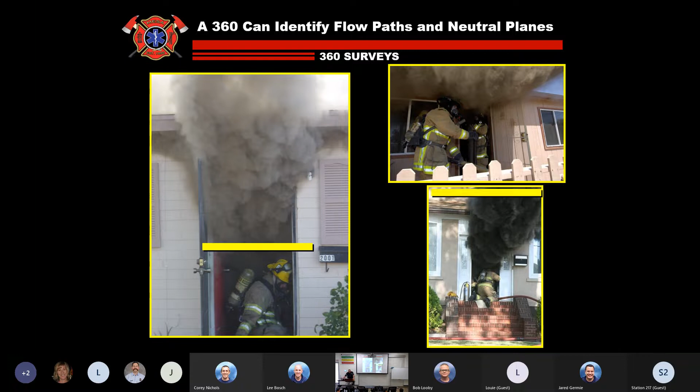It can also help us identify flow paths and neutral planes, and that'll help us determine the seat of the fire or what stage the fire is in. So if we look at these three incidents here, it should be pretty obvious where the neutral plane is, that's where the high pressure smoke and heat is coming out the top, the cooler air is coming down in the bottom, and the line in between is the neutral plane. This is Captain Obvious stuff here, but hopefully that should remind you.

Now, we talk about flow paths, and flow paths, when we get into the reading smoke class here next class, we're going to talk quite a bit more about flow paths. But this is one of the things that wasn't discussed a whole lot probably until about 10 years ago, maybe a little more, where we started discussing flow paths and the challenges associated with it.

We would go, and you see in certain cities, not so much here, but back east, one of the first things the crews do is go around and start knocking out windows. Well, what does that do for a fire that's in a vent limited stage? Gives it everything it needs, right? And then it shouldn't surprise us when all of a sudden the building's fully involved, and they go, wow, that was crazy, how'd that happen? Well, it shouldn't shock us.

But as we arrive on the scene, if we have this where we have the bi-directional vent, whereas we have cold air coming in from the bottom or fresh air coming in from the bottom, hot pressurized smoke coming out above, keep in mind that right now it's probably vent limited, at least in that room right there. We have the ability to go inside and hopefully attack the fire.

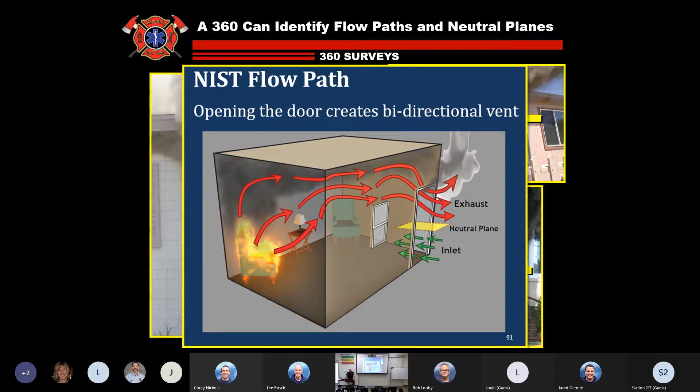Now, when it becomes a little more involved, a lot of times we'll get a window or something that busts out. And because the exhaust port of that window is smaller than the larger opening of the door, you may see just a unidirectional flow. So you have smoke and fire coming out at that window potentially, but you still have the neutral plane coming out the door. And that's because of the size of the exhaust vent, and the different pressure gradients in between.

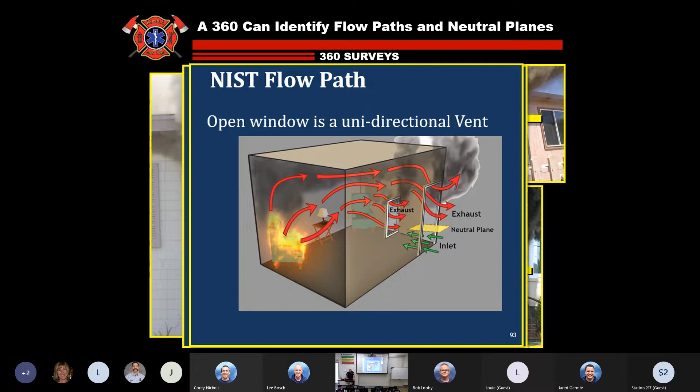Now, where you don't want to be is in a situation like this, where you have a unidirectional flow. So you have the air coming in from the bottom floor here, you've got the fire in between there, and the exhaust port upstairs, either on a second floor or basement area, and you become the chimney of the incident. This is where firefighters get injured and killed on a somewhat regular basis nationally.

They have a window fail, or somebody will take out the window on the second floor. The fire will be on the first floor, it isn't quite in check yet, and it gives it the air it needs. And you got some crews that went up the stairwell to try to conduct a search on the second floor. And in a lot of areas, unfortunately, a lot of the crews in some of these areas, they don't have hand lines.

They don't take hand lines with them, which is absolutely insane. I know here we rarely will enter a structure without a hand line. We don't do what they do in a lot of the cities back east.

I watched a Mayday video yesterday of an incident where they had a crew upstairs and had a flow path and a flashover situation occur. It was an interesting thing, through helmet cams, there's got 4 different views of a helmet cam. I'm gonna probably cover it when we get to the Mayday class that we do here, probably another month or couple of months. But it's really interesting to see because all these people are inside the structure, and it goes from just smoking hot to firefighters screaming and trying to bail out of the structure within probably 5 seconds.

I mean, we've all been in hot fires and zero visibility and think, this is pretty bad. And you come out, sometimes your ears are a little burned or you get some wrist burns and stuff. But this was a situation that was even shocking to see, because typically you don't get interior footage of a Mayday occurring.

This video was pretty impressive to watch, these people literally screaming and bailing out, climbing over people and climbing out the windows and doing everything else to get out of the structure. It was a situation where they had a flow path occur, a flashover occurred in between that process.

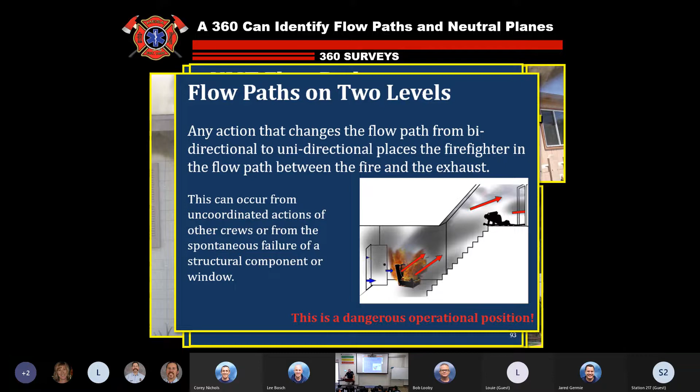Everybody's coming up to help him out, and you can just tell he's not only confused, but in incredible pain. So these are things we just need to be very careful with, and we can recognize those flow paths sometimes in the vent-limited situation as we do our 360s.

So reading smoke, we won't spend a ton of time on this because that's going to be the next class we have, but it's a 3-step process: recognizing and comparing the 4 key attributes of smoke, which we'll talk about next, and evaluating if the building size or weather is influencing those key attributes.

One of the challenges: you go to a big box structure, like Home Depot, and you've got zero visibility inside, we've got a big problem, right? A 100,000 square foot building with smoke floor to ceiling, we're in big trouble. Now, we could go into that same Home Depot and have smoke only 10 feet down from the roof, and think it's not a big deal. But 10 feet down from the roof in a Home Depot is still a big problem for us. Huge fire, right? Those things are massive.

But now, the same thing, you go into a Circle K and you've got smoke 3 feet down from the roof. Still a problem we've got to look at, but probably not necessarily the same situation as far as the size and complexity of it.

We also determine the rate of change, how fast the smoke attributes are changing. As you do a 360, if you notice smoke pushing out the front window when you got there, kind of lazy brown smoke coming out, then you do a 360 and get back around to the front of the structure, and now it's black pressurized smoke...

Are we potentially going to have a catastrophic event getting close here? We have the potential for a flashover or something else probably coming. If things have changed in 2 or 3 minutes from where they were before, you've got a fast moving incident that's probably going to go bad very quickly if we don't change something.

4 key attributes, once again we won't spend a lot of time on these. Everybody's going to talk about the volume of smoke, whether we've filled the box basically. The velocity and pressure, determined by heat, volume, and distance to the fire - the hotter the fire, the more curl and expansion will be evident. Density is the thickness of the smoke, identifying the amount of fuel and danger and likelihood of an event occurring. And then color, which indicates the stage of heating or type of material burning.

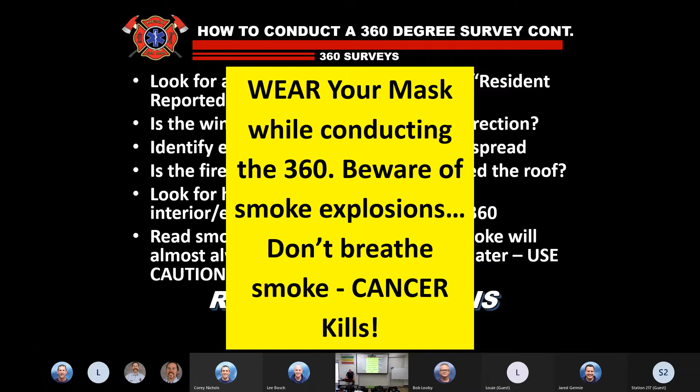We had a couple of our firefighters injured in Tempe with a smoke explosion, donning their gear in front of the front door. They were about 10 feet outside the front door, pulled the line to the door, and they were masking up in front of the door. There was a big smoke explosion that blew all the way out to the street, giving them both second-degree burns to their hands and faces. So anytime you're doing a 360, anytime you're even approaching a structure, make sure that you have your mask on and don't breathe smoke.

Okay, so as we're conducting that 360, we're going to evaluate each side, look for victims, look for any ventilation openings, consider closing, let's say, doors and windows. Use the thermal imaging camera to help identify the rooms and compartments of fire involvement. Do this even during the daylight, and you'll see a little video here to help you out with that. But identify pertinent strategic and critical fire ground factors, a list of 75 items up here.

And this is one of the challenges, you guys. I know maybe it doesn't seem simple, but as a company officer, if you really realize the amount of things a company officer has to do between dispatch and making entry into a structure, it's mind-boggling. There's literally probably several hundred items you have to at least run through your mind at some point in time. Everything from building construction to the stage of the fire, to occupancy, to victims.

There's just so many different things you have to consider. Now we're doing a 360 and all the things we're locating there. It really is mind-boggling the number of things you have to think about. But hopefully as you think about these things, learn about these things, practice these things, it'll become more second nature to you, so it's not a challenge to remember what am I supposed to look for when I go to the back of the structure. And if you're unable to complete the 360, obviously you assign it to the next company coming in.

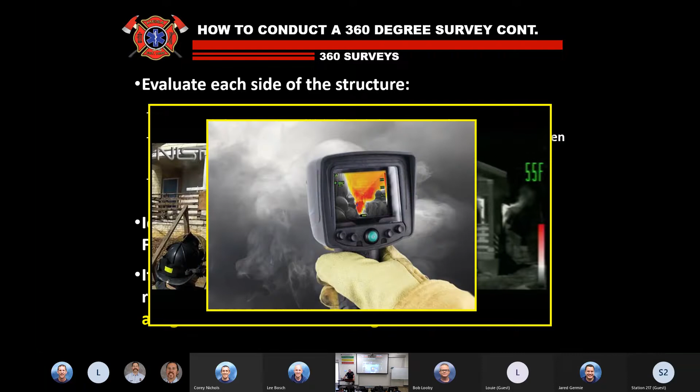So you can see here just a thermal imager during the day, the differences you can see here to determine -- not that you're probably terribly confused about the location of the fire, but it's not obviously rolling out the front door either. So this may give you an idea of the seat of the fire, and just helps remind you, once again, on the 360.

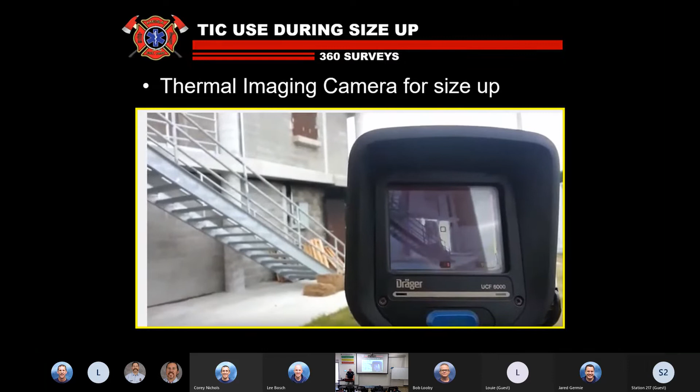We scan down. We obviously pick up a hot door. Back up from command, going over 200 degrees. Team 3 is on attack. Second floor is still not showing anything significant. Team 2 is out, Team 3 on attack, Team 4 back up.

No visible signs of fire at this time. We just have smoke pushing. Come around again, we're showing 200 degrees. As we move over to the Charlie side, we've got temperatures over 400 degrees, isolated in this room here. Floor above is not showing any significant heat. We scan down the wall. Our temperatures are also about 350 down here. Our greatest concentration of heat, though, is over here in the Charlie Delta corner.

Same levels here at about 200. Levels here over 300, pointing to the point of room involvement.

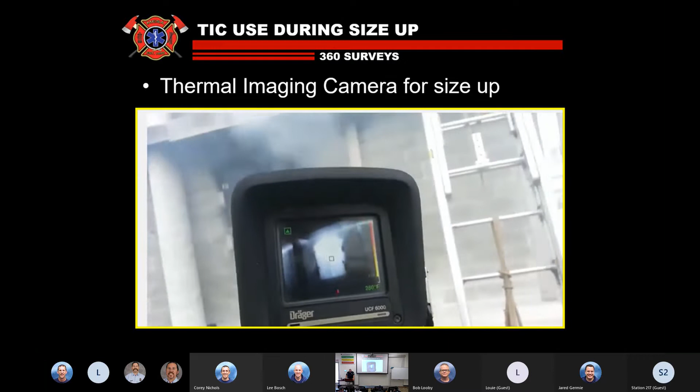Obviously, most of the fires we go on aren't in burn buildings, but still, a lot of the stuff we have here, we can determine potentially the seat or location of the fire using a thermal imager.

I'm not always sure the company officer takes a thermal imager when they go in. I'd hope they would, and I'd say probably in the majority of situations we do. But there are times where, as the initial company officer, there's a lot of things they're thinking about—grabbing a tool, doing a quick 360, humping hose and everything else. But we need to have that thermal imager with us anytime we enter the structure as far as the company officer is concerned, so please make sure we do so.

Captain Butler sent something out about this a while back. Some of the modern fire behavior studies have looked at the differences between modern windows and old windows. If you look at a modern window, it can hide heat signature due to the multi-pane insulated glass. So you may do a 360 and not be able to see smoke and fire inside that structure, not realizing the seat of the fire is on the back side of that window. Compare that to an older single pane glass window next to it, where you can obviously see the differences in heat signatures.

So even though we're going to do the 360, sometimes we can still be fooled potentially, so we're going to look for all the different signs of a fire.

Points to consider with the information gathered: fire location—this will help us determine the egress plan. All else being equal, use the fastest route to get water to the seat of the fire. Where's the fire going? Hopefully that'll also tell you whether it's going to extend east to west, front to back, this building to suite one to suite two, or whatever else. Those are things we ought to be looking for, probably able to see on that 360.

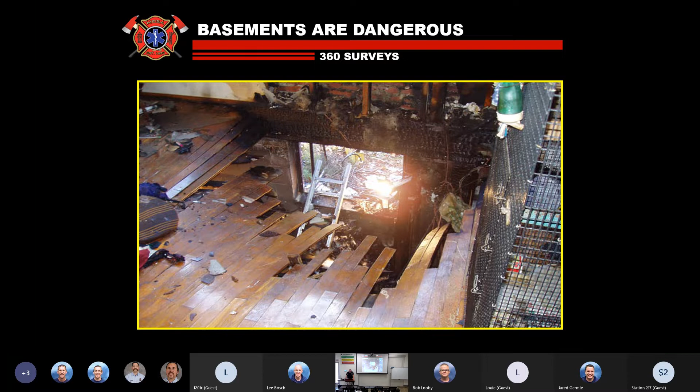Anytime you have a basement fire, it's a high risk situation, really is. This is an incident of a fatality that occurred. It's been a couple years ago now, but a basement, literally walked in the door, made a right turn for a right wall search, and immediately fell into the basement. Was killed. But a couple things to think about, just to understand basements, the challenges you have with basements, not always easy to identify unless you do a 360. Limited access and egress we talked about, most of the time it's just one way in, one way out, other than the window wells for the most part. Flow path is predictable, but can be hard to control.

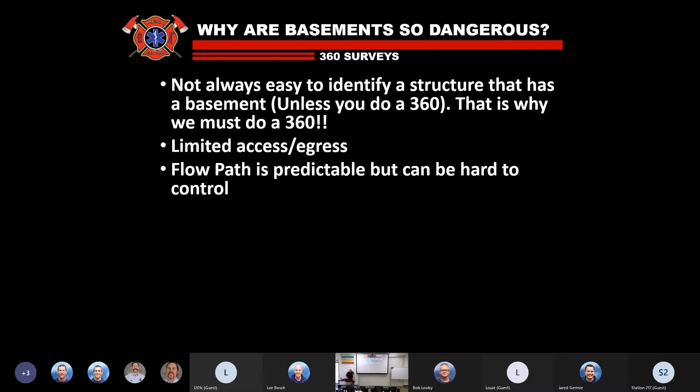Usually it's going to be right up that stairwell in most situations, sometimes out of a window well, but most of the time the largest exhaust port to create that opening is going to be the stairwell.

Working over unchecked fire, the TIC can be misleading. They used to say as long as you go in, you scan all seven sides as you come into the structure. The UL studies show that a lot of times you can't see the fire in the basement through the floor because of the new insulation, the thin-set they pour over the basements, just all the design now. They said a lot of times you will not be able to tell as you come into the structure, just doing a scan with your thermal imager, whether there's a fire beneath you or not.

We don't enter window wells to fight fire, we've talked about that already. Numerous line of duty deaths in fire department basements. This came from NIOSH yesterday, came out with that fatality that occurred last week with the captain. It just talks about how one of the most dangerous fires we fight is a basement fire. Once again, the increased risk is due to limited entry and egress, working above the fire, weakened floor structures, being caught in the flow path, unknown fire load, and ventilation issues.

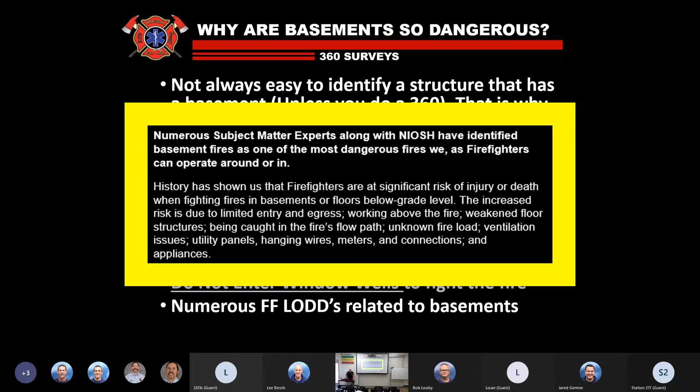All those things come into play with the basement fire. It's extremely dangerous, we need to be very careful. If we talk about basement fires just for 10 seconds, trying to put one out is very difficult.

I've been in a situation where we tried to do it in a big house in South Tempe, back in my day, around '85 or '88. It was just a chimney. We sent probably 8 or 9 crews down into this thing, and every one of them came back just burned up. We could not get this fire out. I think we talked about it in one of the last meetings, about getting high expansion foam and filling the basement up. It was just kicking our butt, we couldn't figure out how to do it.

We were cutting holes, using chainsaws to open windows on the first floor, cutting holes just inside the window from the outside to try to stick nozzles through the hole and let it spray in there, trying to do anything we could. It was just creativity and a huge challenge for us. Not easy to do, very dangerous, but not something you want to walk around inside of a structure with a basement fire.

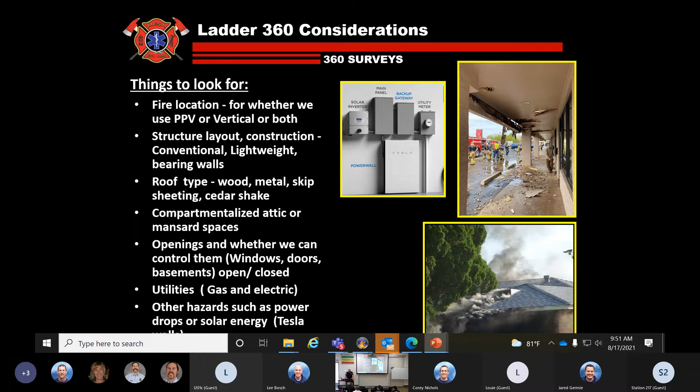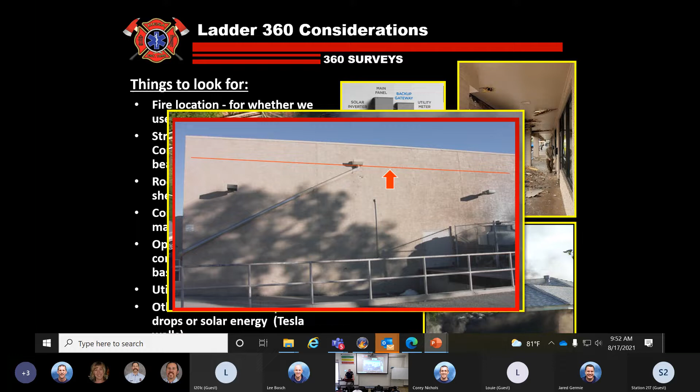Okay, so we start looking at things we're going to see on the 360. Obviously, if we make a pass around the house, as Paulie talked about here, and we've got solar panels on the roof, it's going to give us some concern. We're looking at scuppers, obviously look at parapet levels. There's a number of things we check as we do a 360, in addition to the other things we've talked about already, but some of the things that come to mind.

Here's some hazards that we look at also during the 360. Locked gates - what do we do with locked gates? Can we get through a locked gate? Most of the time it's pretty cheap, and most of the time you give it a good size 12 and it's probably going to come open. Other times it's going to kick you back and maybe a little more difficult.

But can we climb block walls? We can, it doesn't work very well. I've tried a couple times and it's not good for big people. But it's possible - it's one of those where the potential for injury and other things probably is a little more than we're probably looking for.

Wooden fences - can we, maybe instead of going through the gate, just take a section and pull out a couple boards, if not the whole section, to give us enough room to get through? How about the 4x8 by 16 blocks - can we pull those over?

Yeah, about every 3 courses - any concrete folks in here, block layers? Every 3 or 4 courses they have the ladder little thing to kind of keep it intact, but you can probably take down at least a few layers and probably push the whole fence over if you want. I know I've seen that before. But anyway, some different options we have if we need to.

Can we look over the neighbor's fence? If we can't get in the backyard because of the fire, the wind, or whatever else, can we take a quick peek over the neighbor's fence and see the back side of the house? We don't always have to get in - if this gate's closed and right next to that one, maybe I peek over this one instead.

Angry dogs - have we ever encountered angry dogs in the backyard? Freaking dogs, man, those things are protective as the son of a guns. I can tell you I've watched a lot of firemen run from big dogs. It's unpleasant, but most of the time, especially if we have the RP out front, they can grab the dog and tell them, hey, grab your dog, get your dog, so we can get them out of the way. But be careful also, try not to let the dog out, because I can tell you a lot of owners are more worried about their dogs getting out than their house burning down, so be careful about that.